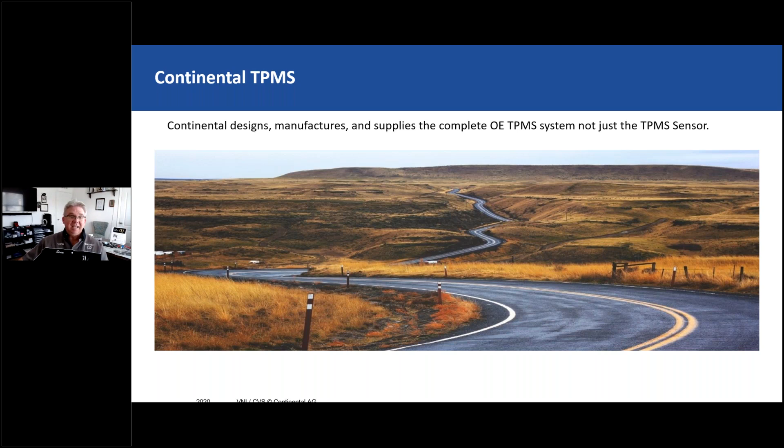Continental's TPMS: we design, manufacture, and supply the complete OE TPMS system, not just the wheel sensor. In '98, we began developing TPMS products. In 2003, we became an OE supplier of direct TPM systems and sensors in North America. In 2005, we introduced VDO branded replacement sensors to the aftermarket, the part houses, everywhere like that might be using these. And maybe many of you have seen these sensors.

And in 2018, we have produced over 300 million sensors. So that's a lot of sensors, and we're not the only sensor manufacturer out there. Obviously, you know that, there are many other sensor manufacturers. So just think of the number of sensors that are out there on the road.

So let's quickly cover the mandate. Many of you are probably familiar with this. If you're not, and you have questions of why, please ask those, but we'll briefly touch this. Again, if you have questions, go ahead and ask those.

The mandate was a phase-in over a 3-year period of time. Model year 2006, 20% of all vehicles sold in the US with 4 wheels and a gross vehicle weight rating of 10,000 pounds or less had to have TPMS. Model year 7, 70% of those vehicles sold in the US had to have TPMS. And by model year 8, or September 1st, 2007, it became 100% mandated.

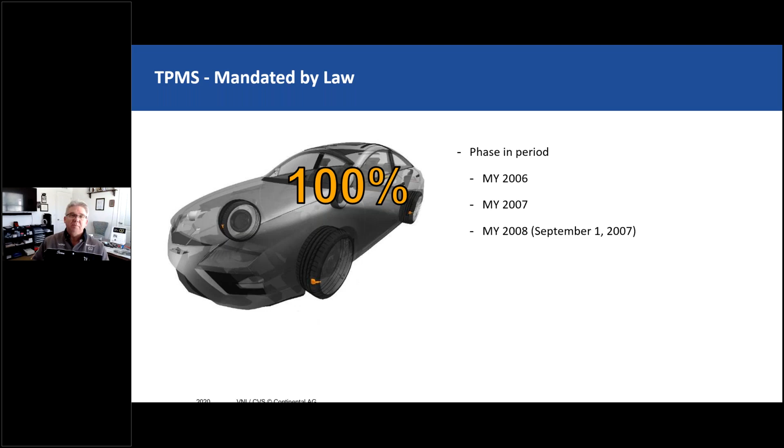That mandate had basically 2 levels of requirements to this rule. First, it must detect and provide a warning to the driver within 20 minutes of the pressure of 1 or more of the vehicle's tires, up to a total of 4, falling 25% or more below the recommended cold inflation pressure. This was illuminated solid as a low pressure warning telltale, displayed as a cross section of a tire with an exclamation point inside. That was the first requirement.

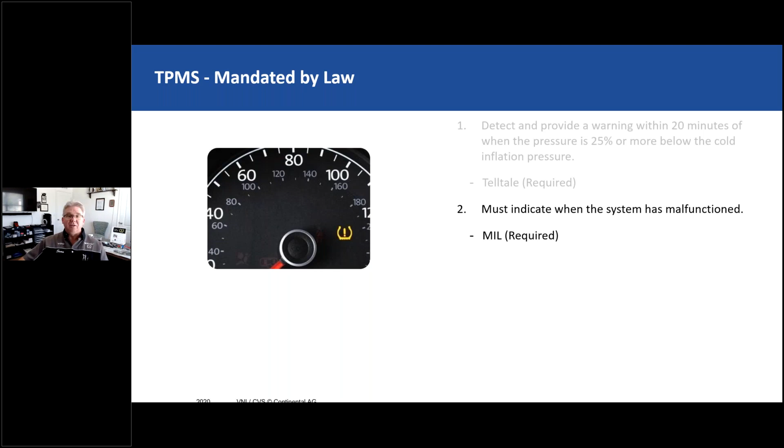The second requirement is that it also must indicate a system malfunction, as a MIL, or malfunction indicator lamp, which must flash indicating the system has malfunctioned. A top-down view of the vehicle is not required, but this shows the 4 pressures displayed as an overview or a bird's eye view of the vehicle. This is becoming more and more standard on many vehicles.

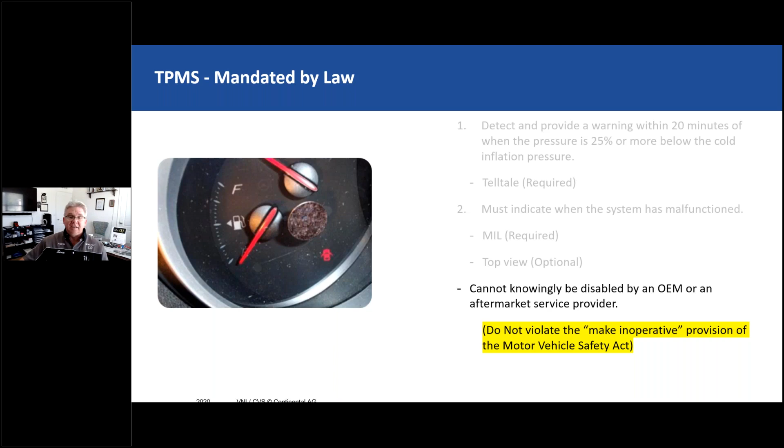There is also a make inoperative provision to the Motor Vehicle Safety Act. It states that this system cannot be knowingly disabled by an OEM or an aftermarket service provider. You see that picture showing a piece of tape covering the light. Many of us have seen this in the past, a picture of a family member or something like that covering that light so that we don't have to look at it. As technicians, we cannot do that. It is violating this Safety Act.

So what is a telltale? It's a device or object that automatically gives us a visual indication of the state or presence of something. In regards to TPMS, the telltale is displayed after key on, first a bulb check like many other telltales and gauges, approximately 3 to 5 seconds.

After that, the light will either go out, remain on constant, which means there's one or more low tires, or it will flash. TPMS flashing with a MIL is only required to flash for 60 to 90 seconds, and then it will go on constant.

This means there's a system problem. Most of the time, that system problem is sensor related. Yes, there could be problems with modules in different parts of the car that relate to TPMS, but most of the time, it is a sensor issue.

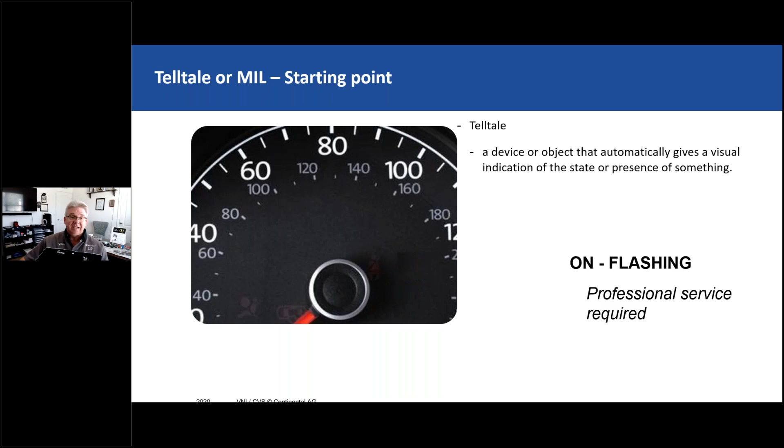And this cycle will repeat every key on. It'll repeat this exact cycle until the problem is fixed.

Now, we'll talk real quick on 25% below, because most manufacturers don't do 25%. They're in the 12 to 15% range. So if we take 32 for example, 12% of that is right around 4 PSI. So that means at 28 PSI on many vehicles, that light's coming on.

4 PSI is really nothing. We can easily see that loss on a cold morning after a warm day the day before, or working in a shop on a vehicle where it's 60, 70, 80 degrees, maybe 90 in the summer, or 100, 110, and it gets down to 60 or 70 degrees in the morning. That's 30, 40 degrees difference.

We lose and gain about 1 PSI for every 10-degree temperature change. And we lose about 1 to 2 PSI every month.

So think of a vehicle, you're working on a vehicle and you put 32 PSI in and it's 100 degrees in the shop. That vehicle goes outside, temperatures equalize, sits in the driveway or the garage in the morning. It's a cool morning and now it's 70 degrees. That could be 30 degrees difference, or 3 PSI.

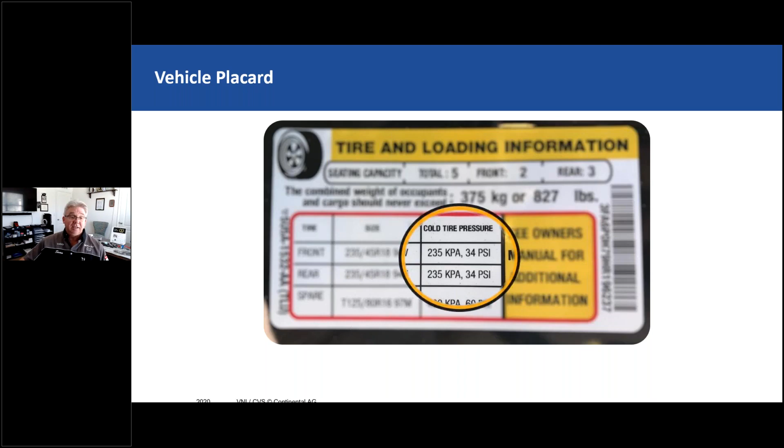So system types. I'm going to talk about the two types of systems, and then later on we'll talk about the types of direct systems. There's multiple types of direct, but there's basically two ways that manufacturers use to determine a low tire.

So indirect, it's a system that operates in conjunction with the wheel speed sensors, the ABS system, different things like that, along with other signals and some software processing. And this system can indirectly determine if a tire, up to 4, is underinflated. And that's the key word, indirectly determine.

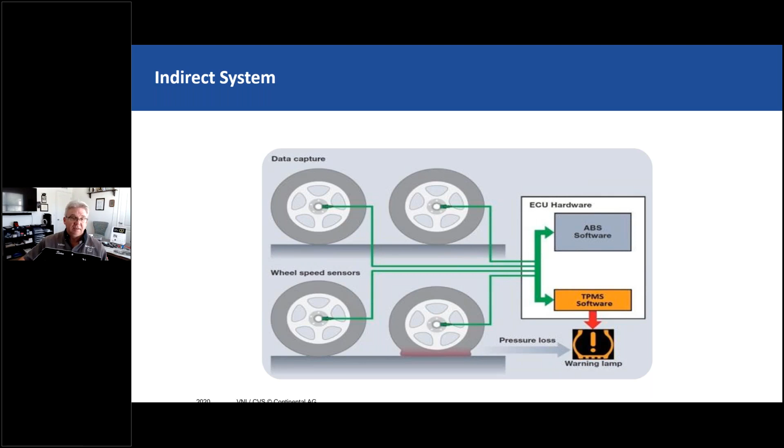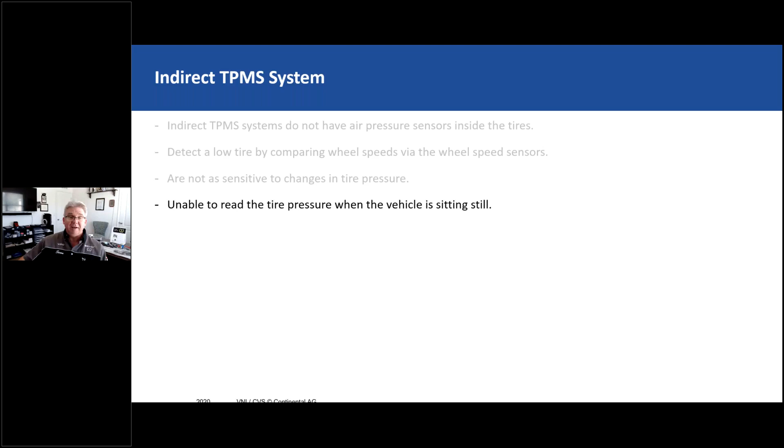Indirect systems do not have sensors inside the tires. They detect the possibility of a low tire by comparing wheel speeds via the wheel speed sensors. They're not as sensitive to changes in tire pressure. Unable to read the pressure when the vehicle's sitting still, has to be moving. We have to look at that signal we're getting from the wheel speed sensor.

It is very low cost to the manufacturer, and many manufacturers had to abandon this type of system to meet the federal mandate. One of the weaknesses of the older indirect systems is that it may not turn on the warning light if all tires are equally underinflated.

So going 3 or 4 months, we lose 3 or 4 PSI. If there's no other pressure loss other than natural, all the tires are going to be about the same. And on some of the older systems, it would not detect a difference because they're all rotating the same. Most of those are gone. Cars are still out there, but manufacturers are not using that type.

New systems, though, are taking advantage of better wheel speed sensors, maybe not counting pulses, but timing the distance between pulses, different things like that. And if you haven't seen them, here's some wheel speed sensors. Continental manufactures many different wheel speed sensors, and these are the key component to an indirect system. If you have one of these fail, sure, your TPMS is not going to work, and there's ways to look at that, and they use some software to determine if maybe that tire's not low, maybe it's a failed piece.

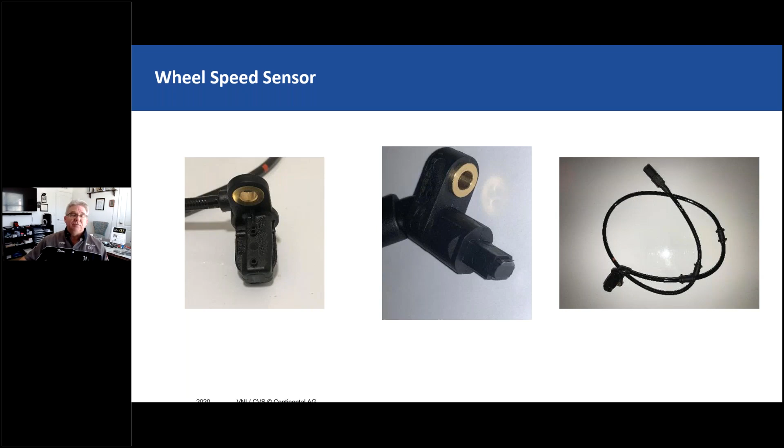But either way, if you have one of these fail, as most of you probably know, you're going to have other issues, other trouble codes, other lights that come on, other systems in the car that now are not going to work properly. TPMS will just be one of those that could be eliminated as far as functioning properly.

And with an indirect system, most of them have some sort of a reset button or a software selection for recalibrating the system. The reset is typically required after changing air pressure in one or more tires, replacing or servicing a tire, rotating the tires. These all require reset. And on some of the older systems, it is recommended in the owner's manual and in service manuals not to just replace 2 tires or 1 tire, but rather all 4, because even 3, 4, 32nds of tread depth difference can cause this light to come on. So newer systems are better, but there's still vehicles out there with these types of systems in them.

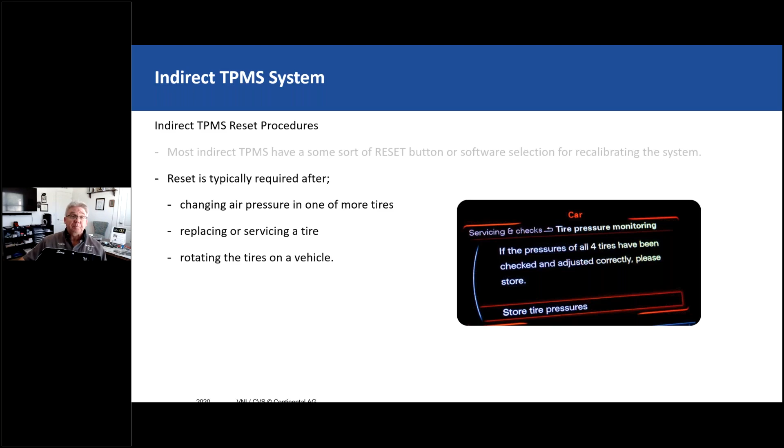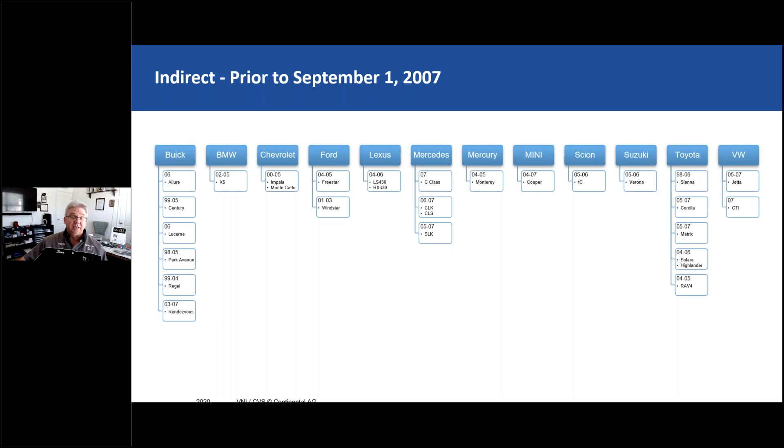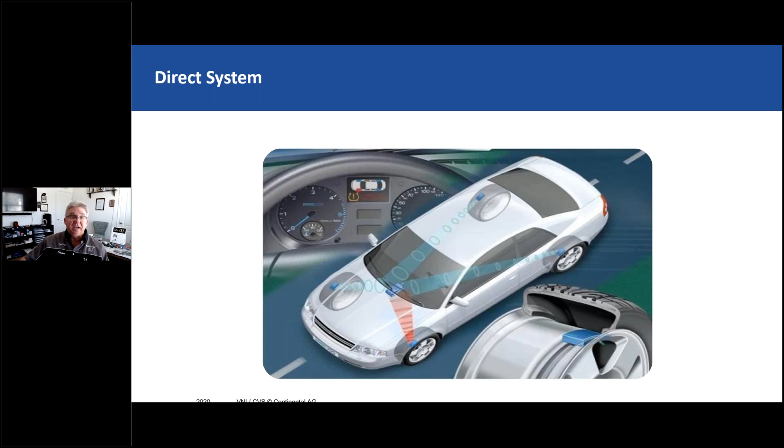Now, direct systems actually use a sensor in each tire. That's really what we're going to be talking about the rest of this presentation, and that's most of what we see in the shops when there's a problem with TPMS. These physically measure pressure and report it to the vehicle to display a low tire as a telltale, and sometimes, depending on the vehicle, the actual pressures. So a direct system uses air pressure sensors inside the tires. It measures the exact pressure of the tire. It reads the tire pressure when the vehicle is standing still.

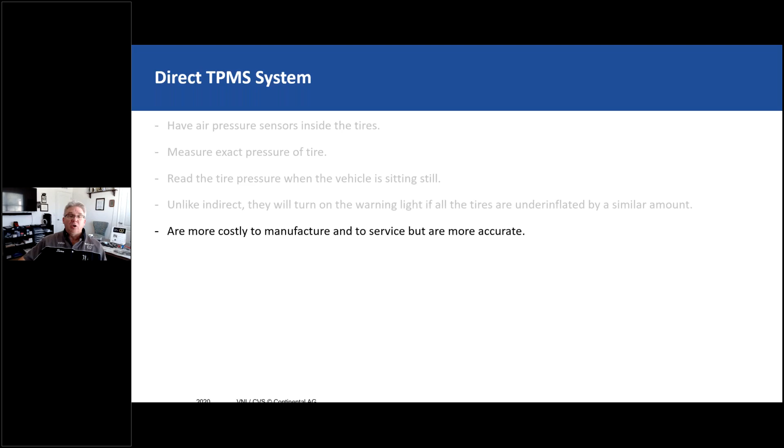Unlike indirect, it will turn the warning light on if all tires are underinflated by a similar amount, because each one is measured individually. They are far more costly to manufacture, far more costly to service, but they are far more accurate as well. And they are capable of displaying pressure by position to the driver, which we see in more and more vehicles today. One thing to note, 95% or more of all TPMS equipped vehicles in the US are direct.

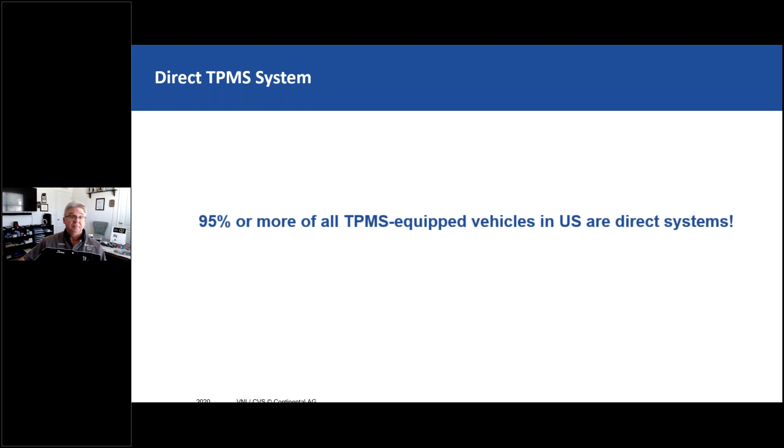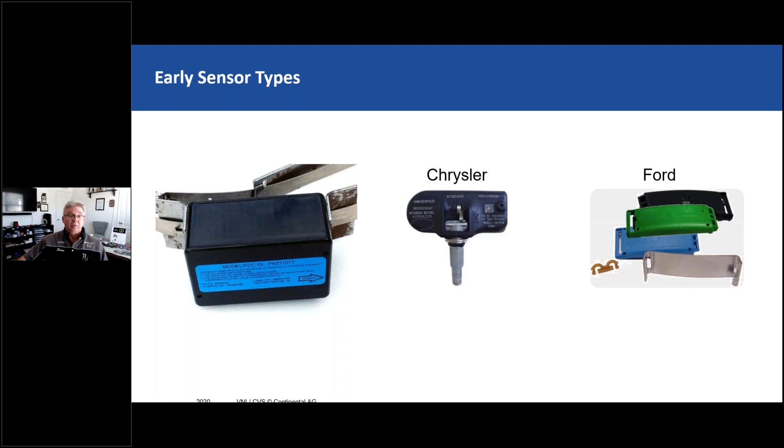Chrysler used a sensor through 2012 that had a little strap, and you can see right there in the highlighted area that was easily broken if not properly handled. This would cause a weak signal to the receiver, but a TPMS tool at the tire wouldn't be able to detect the weak signal.

It would say that the sensor's okay. So many vehicles would have trouble codes stating a weak or no communication from one or more sensors. When you drive it, customer comes in, you got a trouble code. But after a while, or moving slow or sitting there, it would pick up the response from the sensor and the light would go out. This is a reason it is important to have TPMS tools that can read these trouble codes, so you can pull these codes and see what the code is.

And then the banded style from Ford, very common, used on almost every Ford through model year 2010. Has been discontinued, but still can be used out there as a replacement sensor. They're still out there on many vehicles. And I'll probably say it a couple times, but these sensors last about 7 to 10 years, all of them. 7 to 10 years is a typical life cycle of a sensor. So these sensors, model year 10 was the last year. We're coming up on 10 years, but they're still out there.

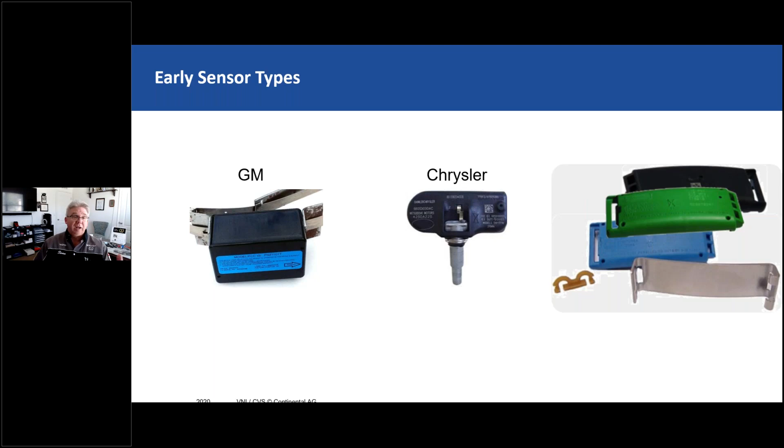Here are two sensors currently in use by Continental today, and other manufacturers are using similar designs. We might see more designs in the future, and I'll show you some of those in a few slides. But this is a clamp-in style and a snap-in style, so a metal stem and a rubber stem. One of the key reasons the stem was metal is because it's stronger. It bolts in or clamps in.

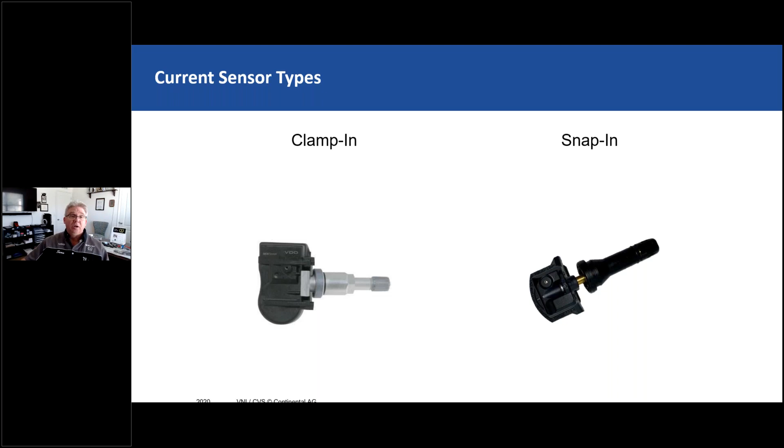And the bodies of these sensors were pretty large, so with centrifugal force spinning that wheel at 70 miles an hour, the force pulling on that sensor, if we had a rubber stem behind it, could actually rip it right out of there. So it was more of a speed rating than anything else. There were other factors, but that was the biggest one. Now, as sensor bodies get smaller, we're able to use, and you see out there, more snap-in style stems.

All sensors have a hole in it. That's what measures the pressure. And this hole can be damaged. It can become plugged. Using tire sealants can actually plug these. Think about, what is a tire sealant for? It's to plug a hole. This is a hole. Could it be plugged? Yes. So we have to be careful of the tire sealant in there. Clean these off. You can't stick anything in those holes, because right below that, about 2 millimeters, is a diaphragm that's made out of, I think, glass, and it can easily be damaged if we poke something in there. You can wash it off with your hands, clean it off, whatever.

And the other thing is, tire sealant won't hurt the sensor, but it could damage the size of the hole or plug the hole. We can wash it off, clean it off, but a lot of people, when they grab tire sealant, they're not grabbing one can and reading the directions that say use half the can or whatever the directions say for that brand. A lot of people buy 2 or 3 cans, because not only are they trying to plug the hole, they're trying to fill up their tire with air as well. So they're using the canned air with the chemical in there that could plug this hole. We just have to watch that and be careful.

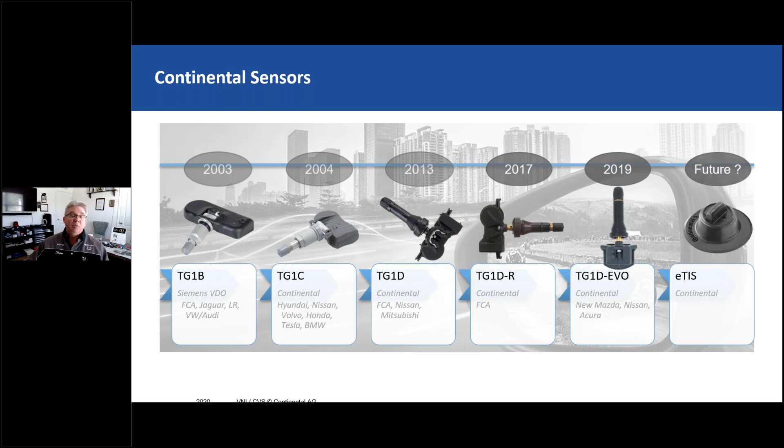It's also used in commercial vehicles, larger trucks. It's actually very small for the passenger cars. And the rubber mount there becomes a service kit, just like all the other sensors have. So if you have to change a tire, you pop out the sensor, you put the new rubber service kit in, snap the sensor back in, and away you go. I got a slide on that in a little bit as well.

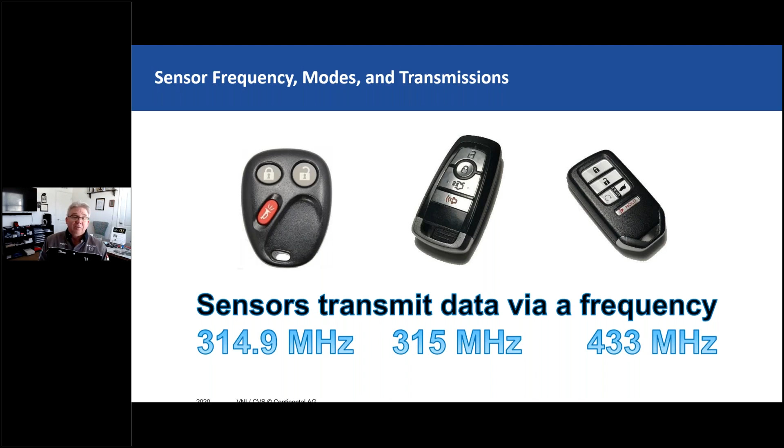So if you need to determine sensor frequency and you have the capability to test a key fob with, for example, a TPMS tool, you can test this key fob. It'll tell you what the frequency is. And then if the parts house needed to know what frequency you needed, then they can determine what the part number is for that replacement sensor as well.

Most all sensors have to transmit a unique sensor ID. It's also printed on the sensor. It's usually printed or used by the vehicle in an 8-character hexadecimal format. Tools have the capability to convert to a decimal, but most vehicles, like I said, store this as a hexadecimal format. Some vehicles only use 7 characters, and a few newer vehicles require certain characters to be in specific locations. So our tools have to be capable of reading this. Tools need to be able to update or load this into the vehicle.

Maybe some of you are familiar with, let's say, a Toyota Relearn. With Toyota Relearns, typically you trigger sensors, you get the IDs, and then you hook up a Toyota scan tool and manually type in those IDs. With a TPMS dedicated tool, the tool does that work for you. You trigger the sensors, the tool stores the IDs, you plug the tool into OBD, and it writes or uploads those IDs to the vehicle without having to worry about copying them or writing them down.

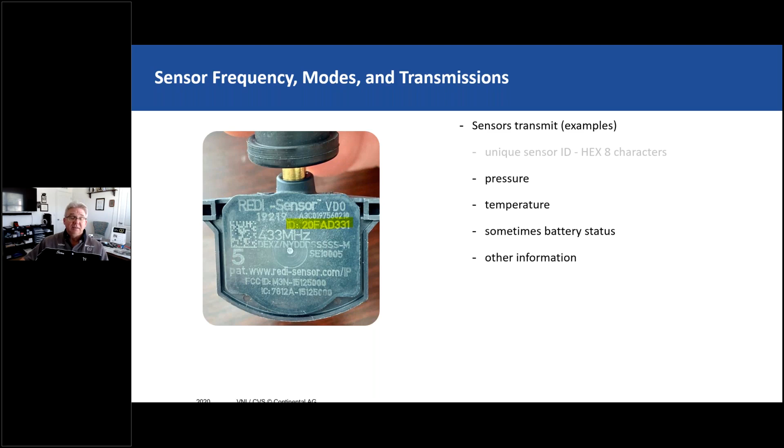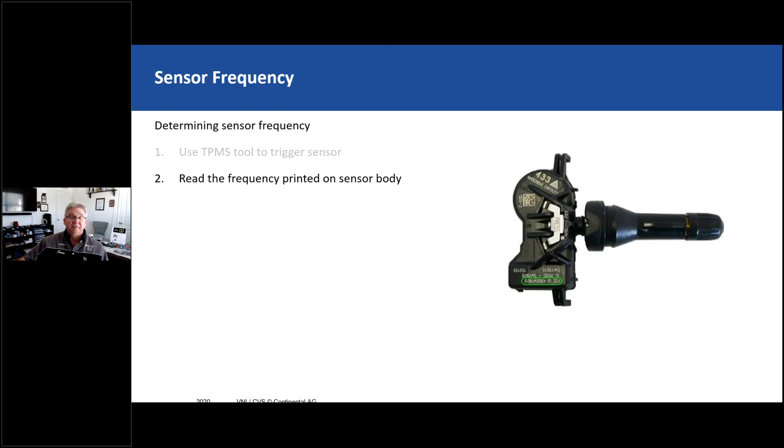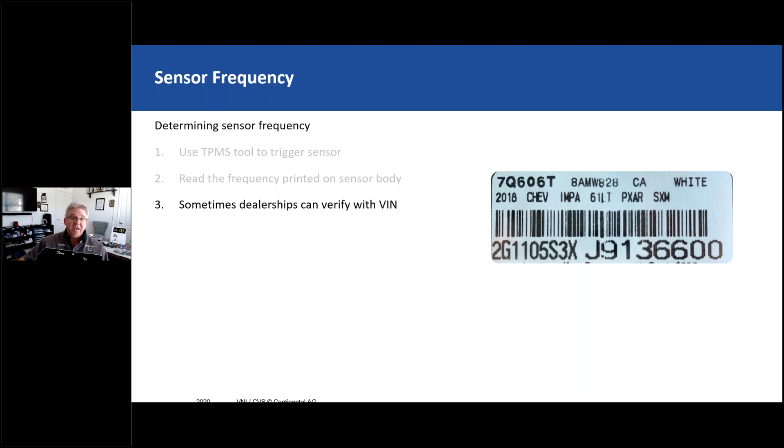So there's many ways to determine sensor frequency. You can use a TPMS tool to trigger the sensor. Most TPMS tools will display the frequency right on the tool. You can read the sensor frequency printed on the body of the sensor, if you can read it. Sometimes it's small, it gets worn off. Plus, you have to break down the tire and wheel assembly to see this. Sometimes you can call a dealership and get it with a VIN, but not always. Depending on the vehicle make, sometimes they don't record this, because they change based on different vehicle platforms. Key fob test on the tool, like I said, that's very easy.

And you can visit the FCC ID website, type in the ID if you can read it on the sensor, and it'll tell you who manufactured it, what the frequency is, pictures of it, all kinds of stuff. So if you ever want to find out what brand or manufacturer or what the frequency is for a sensor, type in the FCC ID on Google and you will easily find this information. A lot of information is found on this website.

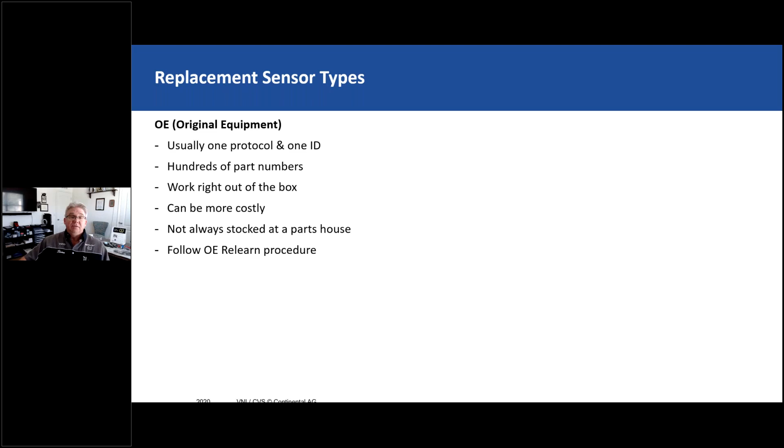So let's talk about the different sensor types. You have the OE sensor, original equipment sensors. They usually have one protocol and one ID already stored in it. There's hundreds of part numbers, yet they work right out of the box. They can be a little more costly, not always stocked at parts houses, and it's recommended to follow the OE Relearn procedure when changing these.

Programmable sensors are delivered blank. They require a capable tool, and that could be an additional tool. And wherever you're getting these from, that parts house must know if your shop has the proper tool to program the sensor. If you don't have the proper tool, you can't program it. You think something's wrong, you send it back, when really the sensor needs to be programmed. Some can only be programmed in a specific cradle. They're suggested to be programmed outside the tire, and the protocol comes from the tool. So if your tool is not updated, you won't have the proper protocol.

Clonable, very close to programmable, very, very close. Again, cloning only copies the sensor ID, but the protocol comes from the tool. Takes time, really the same as a programmable sensor.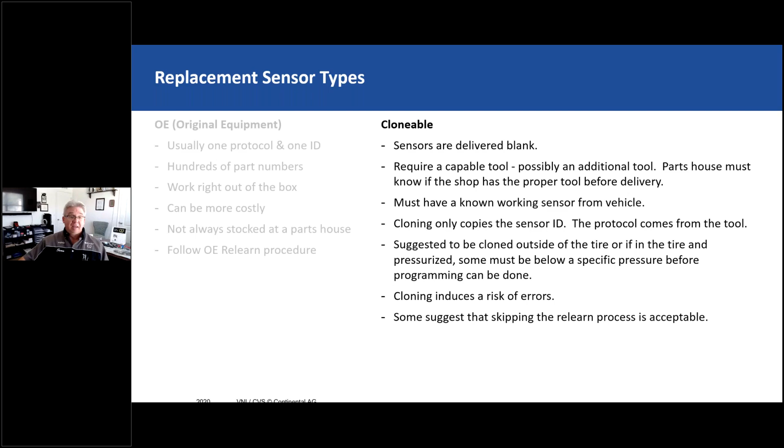And then there's a multi-application sensor. This is just like VDO's or Continental's REDI-Sensor. The difference between this one and the OE is it has multiple protocols already in it. The ID's already there. But just like OE, it works out of the box. It saves time. You don't have to program it. It follows the OE procedure. So it's very, very close to an OE sensor.

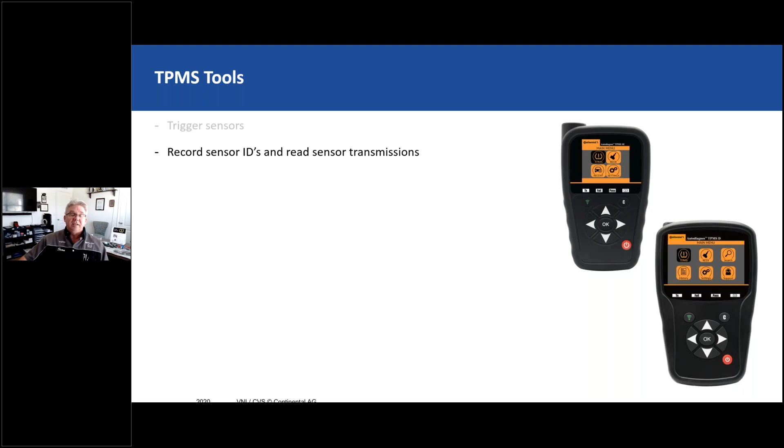So the tools we use. Tools have many functions, and depending on brand and model, these can have very basic or extremely advanced capabilities. Most importantly, they trigger sensors. They record the sensor IDs and read the transmission so that we can figure out if that's the right sensor for that vehicle, if it's working, functioning properly.

They're used to perform vehicle relearns. Key to do relearns on these vehicles. Additional capabilities like uploading to OBD or pulling trouble codes or tread depth gauges or testing key fobs, many different things out there that we can do with these.

They also require updates, so make sure we keep them updated. My team and I visit many shops every year, and 8 out of 10 shops don't have their TPMS tool updated. And it just causes them extra time when they're working on a vehicle. Many TPMS tool companies offer free support, so use it.

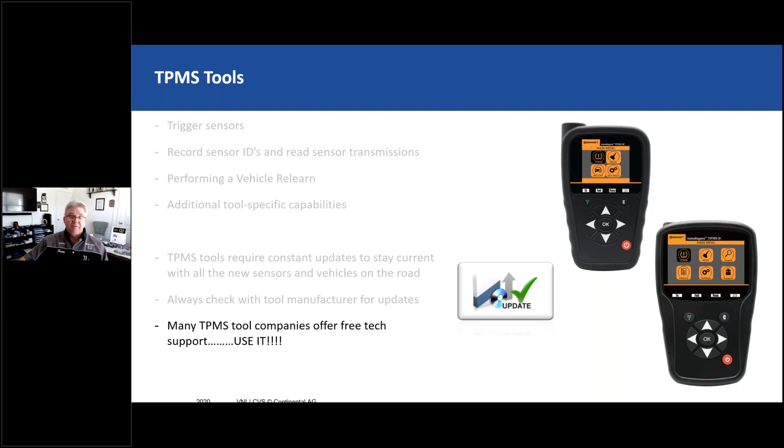Here's just a quick example of some of the tools out there today, but to fully service TPMS, you must have a tool that has OBD capability. When you're triggering sensors, angle the tool downward. Avoid pointing it horizontally at the sensor, and this will reduce the possibility of triggering a spare tire or the opposite wheel sensor. The other key thing is to move sensors away from your work area.

Take them out of your pockets, off your lift arms, off the toolbox, out of the car. Those winter tires that you put in the trunk or the back of the car or the SUV, don't do that while you're doing a relearn, because then we're not talking to 4 sensors, we're talking to 8 possibly. Move those away when we're doing relearns.

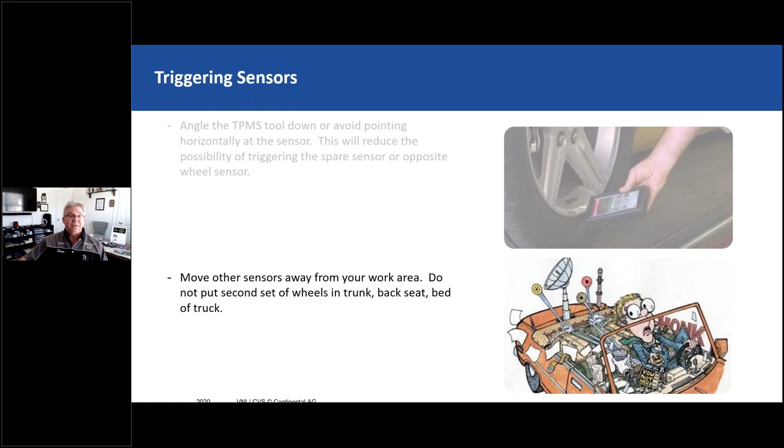Continental has 2 tools now. I won't spend a lot of time on this, but TPMS D, all makes, all models with diagnostic and service capability. The SE services all makes, all models.

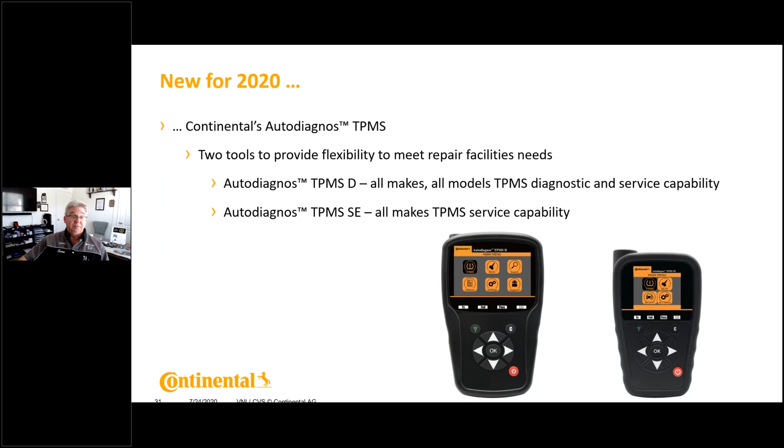Let's talk about relearns real quick. We use the tools to diagnose and perform relearns. It's strongly recommended and of great importance for vehicle owners' safety that following the installation of any replacement sensor or tire rotation where sensors are relocated, a servicing shop should follow the vehicle manufacturer's recommended relearn procedure.

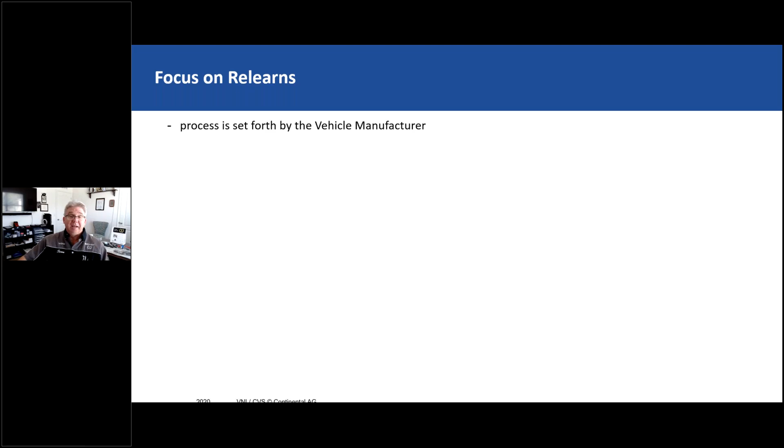It is required to remove previous pressure values, and it's set forth by the vehicle manufacturer. It removes old data that might be there, old pressure values, diagnostic trouble codes. It ensures whether the system is fully functional or not. Right then, when you're doing it, you know the relearn's done, the car is done properly. It establishes the correct tire location, pressure, and pressure reading to the driver.

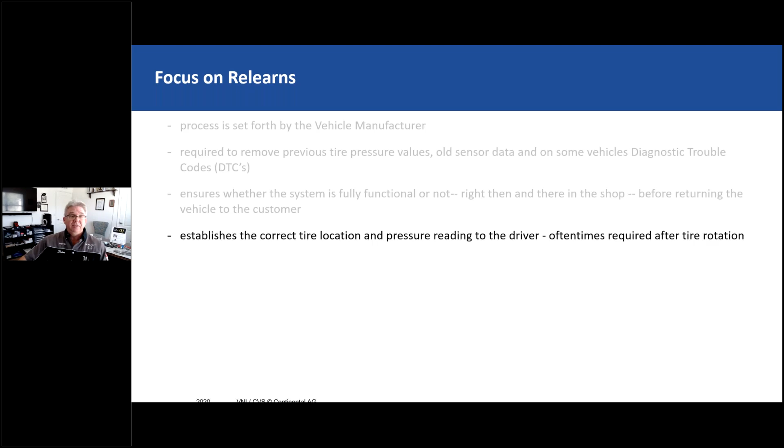You do a tire rotation, many vehicles can't learn that location by themselves. We have to do the relearn. And it's required when there's a change in pressure, even on some models now. And if we bypass this or don't do the relearn, we may be violating the make inoperative provision, because now we've sent a vehicle out and the pressures on the dash are wrong. They're not shown in the right place.

And if a person needs to fill up a tire and they see the left front's low, they go put air in that tire, but we rotated it and it's somewhere else on the car. Now they've overinflated a tire and they still have an underinflated tire. And on some GMs prior to, I think, 2010 or 12, the light was illuminated for high pressure and low pressure. So we would never know which tire or what's going on. So we have to make sure we follow these relearn procedures.

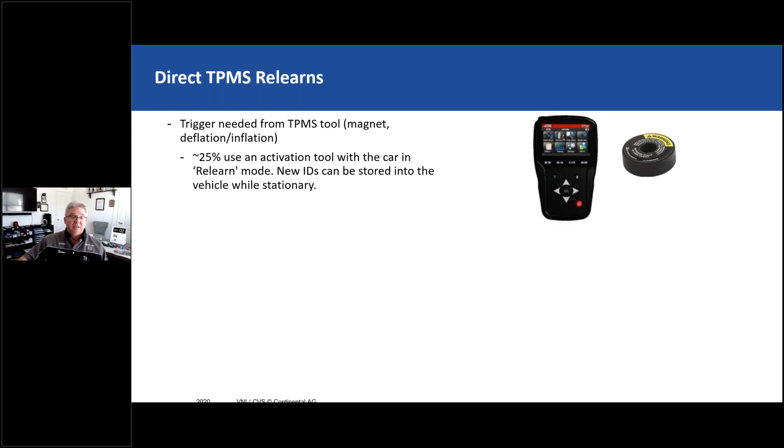25% of the vehicles out there use a trigger from a tool and they use some sort of relearn mode. The vehicle goes into a mode. 35% connect to the OBD. Still require a trigger from a tool, but then you upload it via the OBD2 port. And then 40% of the vehicles can learn new IDs by driving. It's automatic. But many of us in shops can't drive the vehicles, or we don't have the time.

Jaguar, for example, their relearn procedure on some vehicles is leave the vehicle sit for 15 minutes, drive it for 30 minutes over a specified mile per hour or speed, and then leave it sit for 15 minutes. That's an hour of labor just to do that relearn automatically.

On most vehicles, we can use that middle one, which is OBD. So it's either the trigger at the top or OBD, and that covers just about every vehicle out there. Auto relearn's great, but sometimes we don't have the time. And if we let the customer leave with it, and it doesn't complete or doesn't work, then they come back to the shop, and we could have just done the OBD2 relearn. So not all vehicles can do OBD, but most can. And indirect systems have some kind of a reset rather than a relearn.

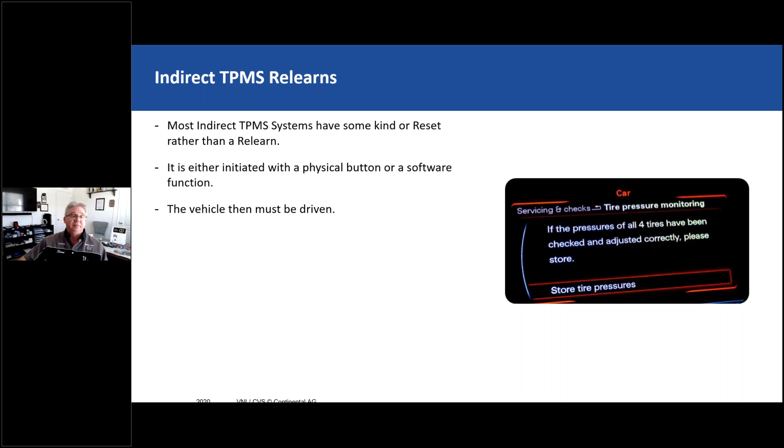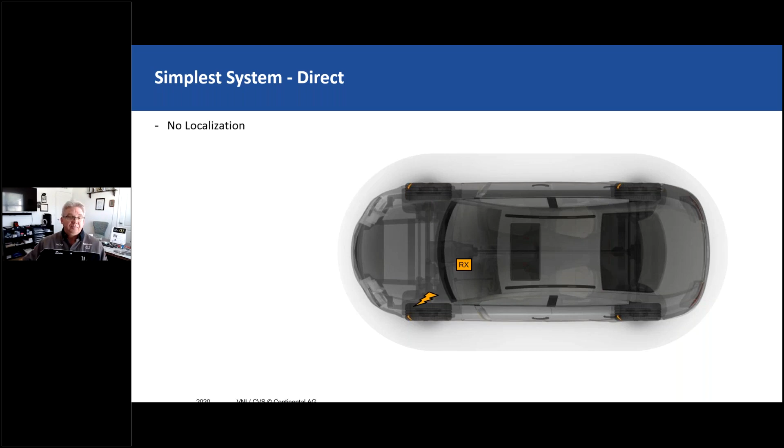So the types of direct systems. Here's an example of a simple system with no localization. During a relearn, it's stationary. Sensors are triggered and the vehicle stores the IDs. This could use potentially any of the three relearn types: trigger, OBD, or auto relearn. However, most are going to be trigger or OBD. Pressure is then received from the sensor and checked against the threshold. Since it doesn't have localization and only a telltale light, there's no indication where the fault is. It's just going to show us the light and maybe tell us that there's a low tire. Even though there's no localization, this type of system still must have a relearn procedure performed. We don't want to get into the habit of not doing relearns or guessing what type of system is in a vehicle.

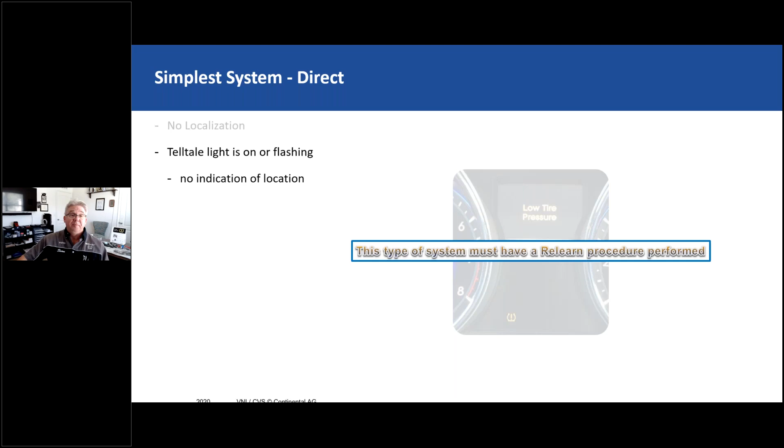Here's an example of a little more advanced system - it's a GM Ford trigger type. Many of you have probably done this. It's commonly used by Ford and GM. Vehicle stationary. This specific procedure uses a sequence of commands from the technician - a key cycle, a key fob press, headlights in a certain cycle, and you've probably heard of them all. There's many. Just so you know, GM has over 20 of those relearn type procedures for these vehicles that they have. But during a relearn, sensors are triggered and the vehicle stores the IDs and location.

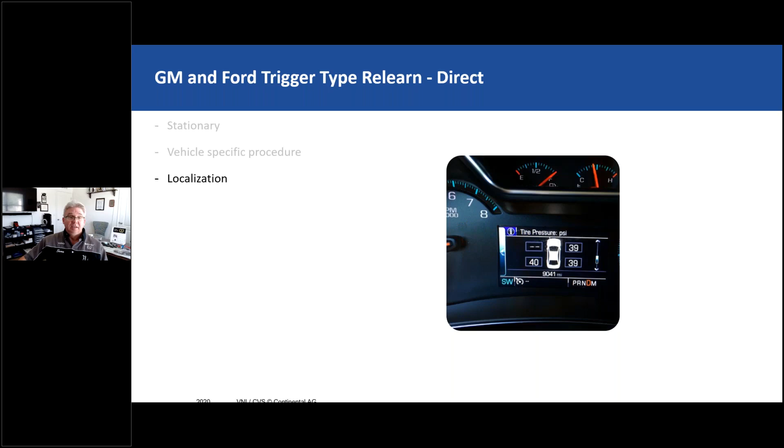Basically, you're teaching the vehicle the sensors and their location, and you follow the directions on the tool. Typically, all vehicles out there start with left front and go clockwise. Honda does have a few that start with left front and go counterclockwise. Now the sensor IDs are known by the vehicle. It's possible that this type of system can display pressure by position. And pressure received by the sensor is displayed and checked against the threshold. If one of them is low, you will see that illumination there. If one of them fails, you might see this. But this type of system must have a relearn performed, or the pressure by position could be displayed incorrectly.

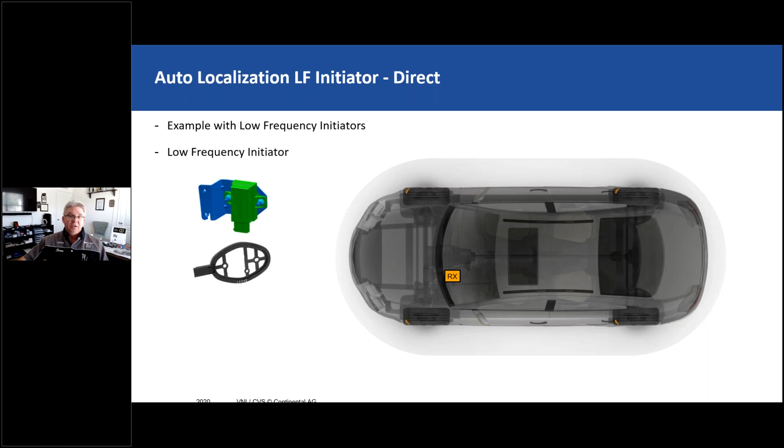Another type of advanced system, and these are all from Continental. We don't have names for the other ones. It's very common they're out there, but this one uses low frequency initiators. They're mounted in the four corners of the tire or of the vehicle. Newer technology allows these two components to be combined as one, but they're located usually in front or behind the vehicle's tire in the wheel well area.

As an example, this vehicle starts driving. The vehicle then says, hey, I need to do a relearn, I need to learn where my sensors are. The system sends signals to the low frequency initiators one at a time. So every time it sends it, it gets a response to the receiver from that sensor that it told to do something - basically wake up. And then the receiver says, hey, I just received this ID. So now the vehicle knows, for example, the left rear - okay, I'll store that ID in the left rear. It does the same thing for the other 3 locations. This type of system now knows the locations. It can automatically learn the IDs and store them automatically. We rotate tires, we change sensors - as long as you have the right sensor for that vehicle, this can be done automatically. Again, you can do an OBD2 relearn on this, but this one is pretty flawless. It works, but it requires driving the vehicle for a specified amount of time.

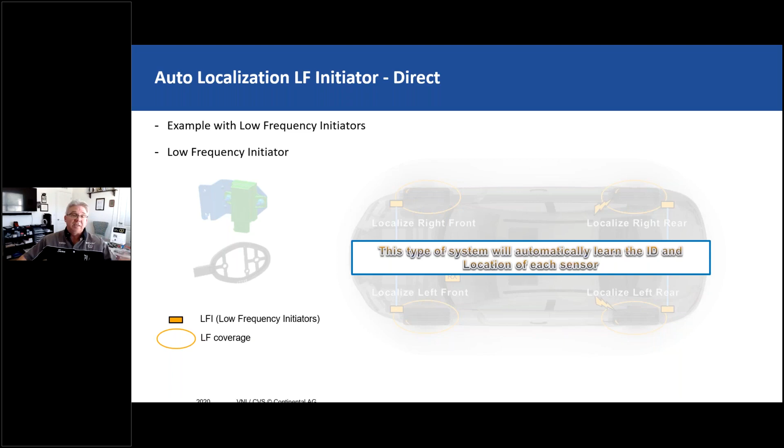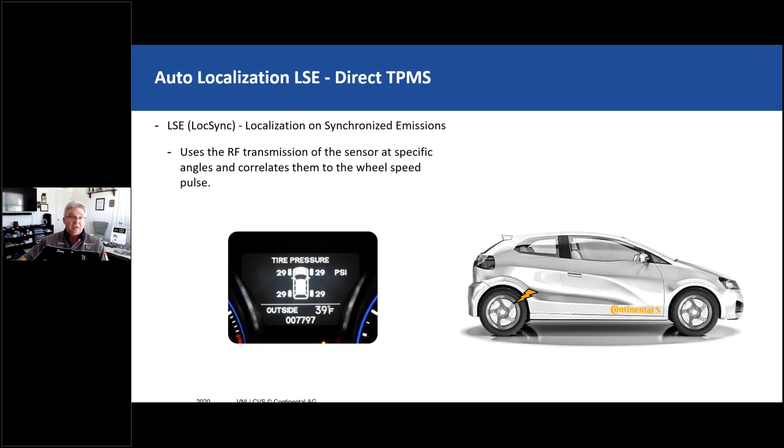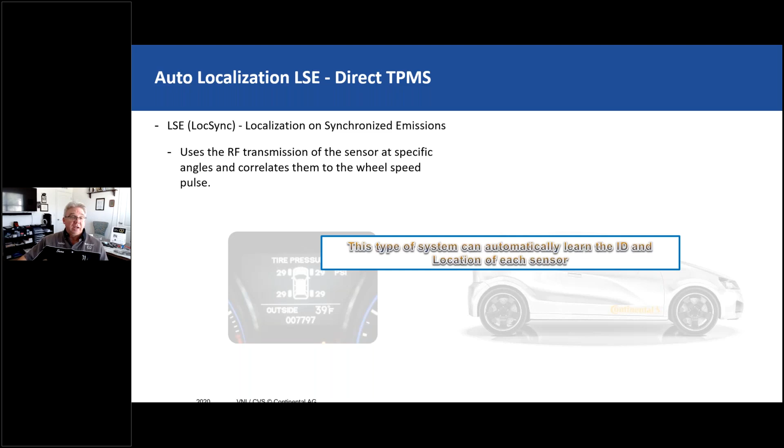Another type of Continental system is called LocSync, LSE - Localization on Synchronized Emissions. It's a Continental system that uses the RF transmissions of the sensor at specific angles and correlates them to the speed pulse. The components of the sensor allow us to have them send information at a specific angle, and the vehicle data can reference the speed pulse information of each wheel at that angle. With complex algorithms and software processing, this vehicle can automatically learn the location of each sensor. A little more detail on this: the sensor transmits always at a fixed wheel angle position. Wheel sensors deliver the position for each wheel.

After a few complete wheel turns, the TPMS sensor transmission fits only to one wheel due to its fixed mechanical connection of the wheel speed sensor and the TPMS sensor sending a signal at a specific angle. There's a lot of software processing here, but you don't need an extra initiator, module, or antenna in the vehicle—just a wheel speed sensor, the sensor in the tire, the TPMS sensor, and software processing. You have to drive this to have it happen, and it's best driven with a lot of turns, because that gets your inner and outer wheels spinning at a different rate and makes the change happen quicker so it can learn the locations.

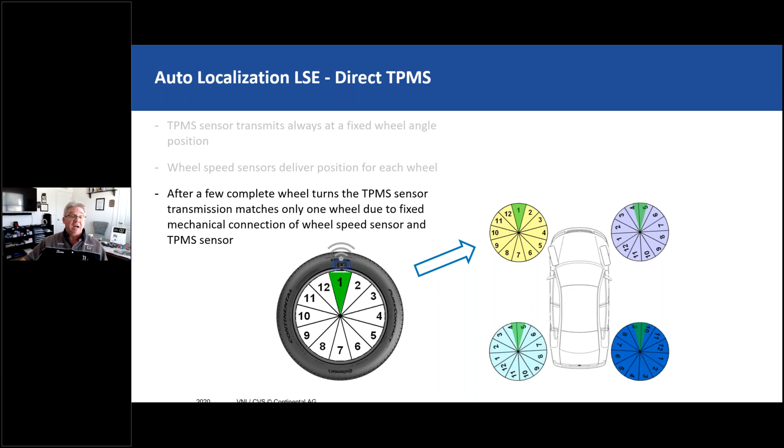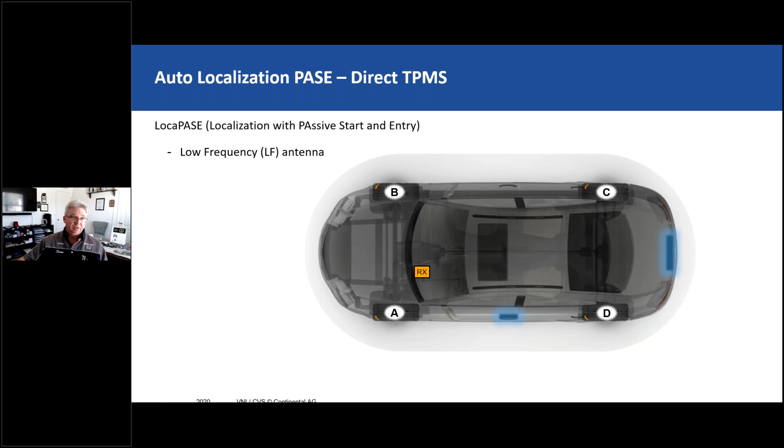Again, it learns all the sensors automatically, their IDs and locations. We have another system called LocaPASE, which stands for Localization with Passive Start and Entry. This is another Continental system. We have low frequency antennas located in the driver's door, passenger's door, and the trunk. For example, here, to save time, I use 2 locations, but it still does the same thing if we use the passenger door handle as well.

Once the vehicle is in motion, the system receives sensor data from A and D on one side, and B and C on the other. As shown here, the driver's door will pick up A and D, so we can determine which sensors are on the left. The receiver knows there are 2 other sensors, so the vehicle determines A and D are on the left, B and C are on the right. Now it needs to know which are in the front and rear. We can determine that C and D are in the rear, so by default A and B are in the front. This uses sensors in the tires, requires the vehicle to be in motion, but uses modules already in the vehicle for passive entry. Again, it can automatically learn the location of all these sensors.

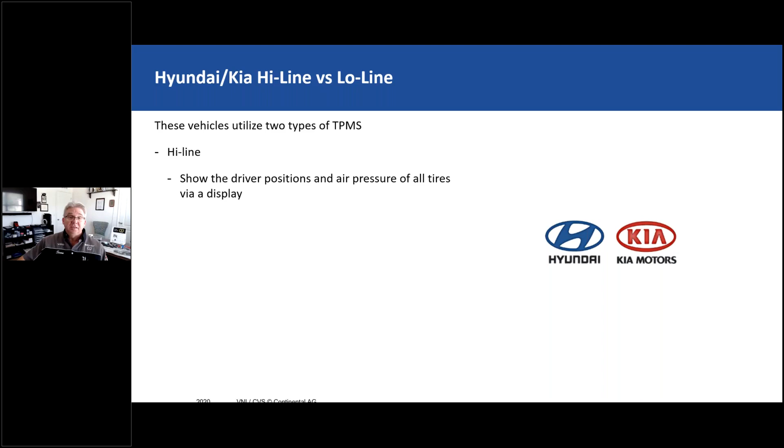So, some quick industry tips and best practices. Hyundai and Kia have low line and high line systems. High line shows the driver positions and air pressures of the tires via a display. Low line does not communicate position, only utilizes the TPMS telltale. Some model years switched mid-year, so be aware of the type of system you're servicing. Sometimes as technicians we have to look at the dash to see if it has these capabilities, because depending on the platform or level of options, a Hyundai or Kia vehicle could have come with low line or high line, and sometimes they use a different TPMS sensor. So we have to determine this before we call up and just say, hey, I need a sensor for this vehicle.

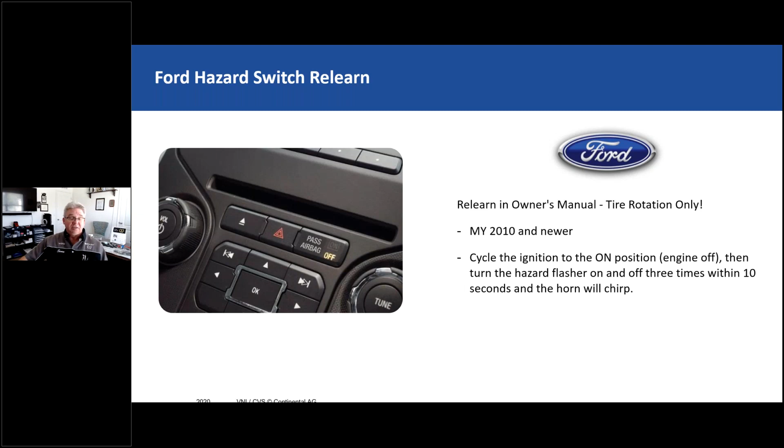For Ford, the procedure listed in the owner's manual to perform after tire rotation on many late model Ford vehicles is just for rotating tires. It states to cycle the ignition to the on position with the engine off, then turn the hazard flasher switch on and off 3 times within 10 seconds. This procedure is to relearn new tire positions after tire rotation only—it will not learn new sensor IDs. You must follow the relearn procedure to learn IDs. This one, again, is only for tire rotation. We get so many calls on this from shops where their tool recognizes a sensor, but the horn isn't honking on the vehicle. That's because the sensor's transmitting, but the vehicle will not learn new sensor IDs this way. We have to do the TPMS relearn procedure, not the tire rotation relearn procedure.

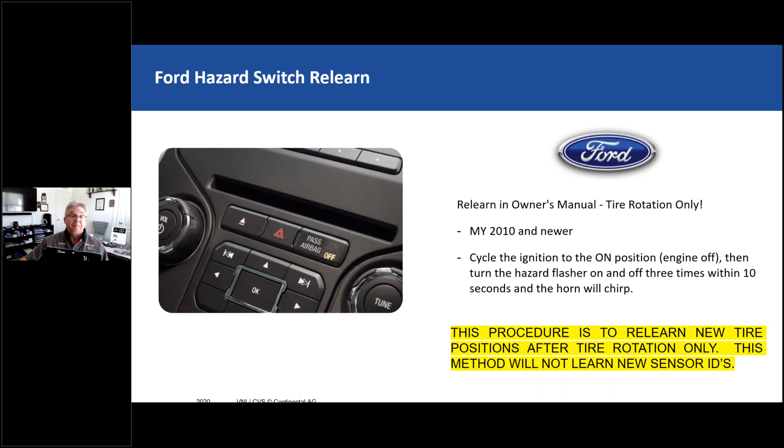Another Toyota thing: they have a main/second switch used on some Toyota and Lexus vehicles for a second set of wheels, like winter or off-road. It's usually located under the glove box. Depending on the tool you use, you may need to make sure the switch is in the main position when doing the Toyota OBD relearn. Check with your tool manufacturer for specific instructions, because there are tools out there that will not do the relearn in the second location for that switch.

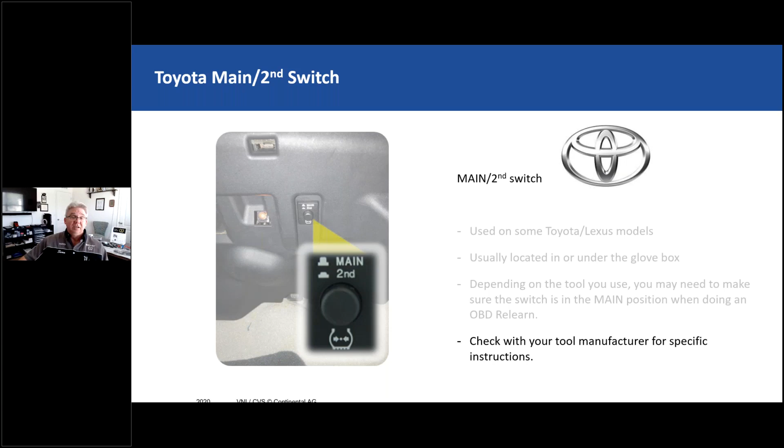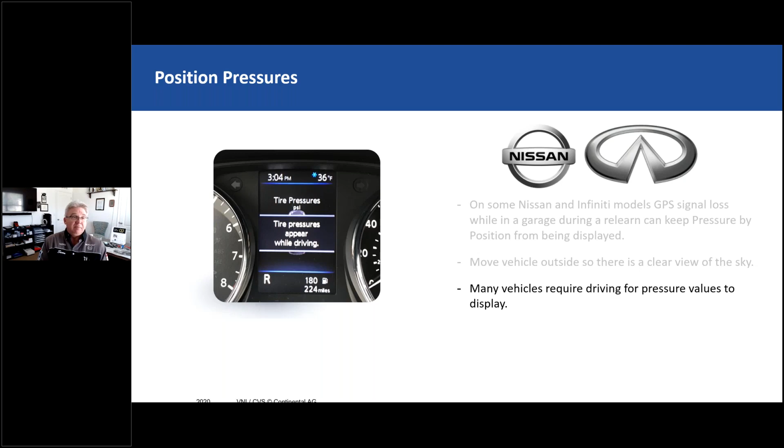Nissan, very common: GPS signal loss while in a garage during a relearn can keep pressure from being displayed. Move the vehicle outside so there's a clear view of the sky. And while we're on this topic, many vehicles require driving for pressure values to display, so you won't see them in the shop. You might have to drive to get it to display.

Stepping back to the types of direct systems, this is a tip rather than how a system functions, since Continental does not manufacture this type of system. This tip involves the use of wheels other than normal valve stem sensor mounting. For example, they mount on the inner side of the wheel rather than the outer, which I'll show you in a second. It's a direct type system referred to as WAL, used on many of these vehicle models. With a WAL system, once the vehicle's in motion at a specific speed determined by the manufacturer, the receiver can determine which axle the sensors are located at, front and rear, and then it can also determine left and right, using signal strength and rotation.

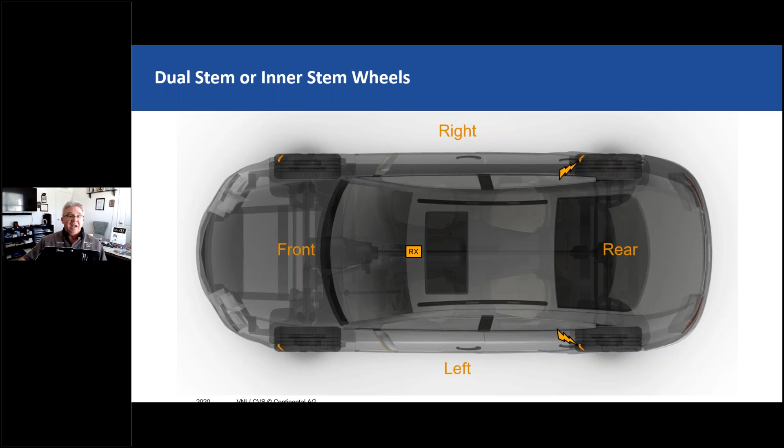So what can happen here is in this type of picture, which is common for some aftermarket wheels, we want them cosmetically to look nice on the outside, so let's put the sensor or the stem on the inner side. This causes problems on this type of system, which has been in use from '07 still through 2020 on those vehicles I showed you, and it probably will go beyond that.

Here's how they would originally be mounted right here. You can see the normal mounting of the sensors, and I've displayed the sensor with a rounded edge and an arrow showing the direction of rotation. This makes it easier to see what happens when you put those types of wheels on a car like this. So now we've mounted this sensor in this wheel, and if you notice, it is rotating opposite than what it was originally.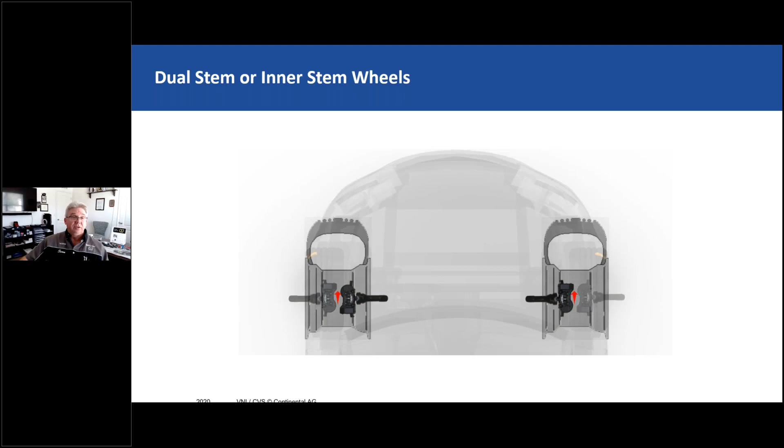We're not going to see a difference or anything; it's still going to transmit the information. But what could happen is, if this was a vehicle that uses this information, those pressures get switched. It won't turn on the light, won't do anything, so now we don't know which is the proper pressure. The driver will never see any indication or notice a difference. But if you have a low tire, it possibly could be shown on the other side. That's just a tip from us. We don't manufacture that type of system, but it is out there. It's called WAL, Wireless Auto Locate. It's very common, works very well. It's just something you have to be aware of.

Some examples of what not to do: strap a sensor on and have another one next to it—I'm not sure what they were doing here. Or all 4 sensors strapped into a wheel, put a tire on it, air it up, throw it in the trunk. Or a PVC pipe pressurized with sensors, throw it in the back seat or in the trunk. And then duct tape—it's not as strong when it's seeing 70 Gs pulling on a sensor, ripping it right out of the drop center of that wheel.

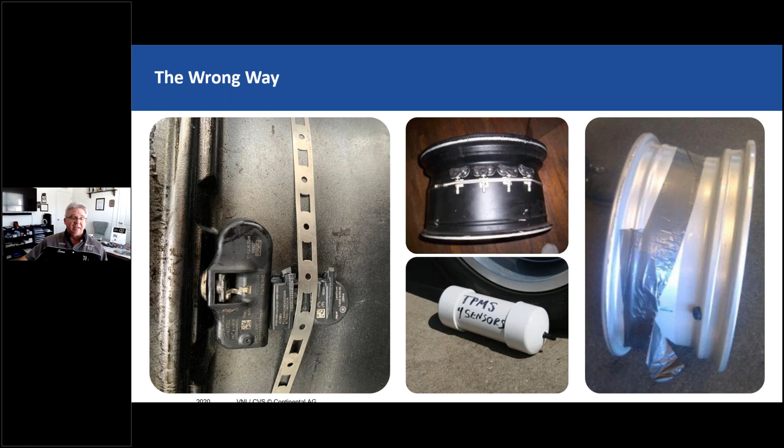So, enhancements and the future: we now have selectable tire fill alert, tire fill assist, tire fill alert, easy fill alert, trailer TPMS, tire temperature and pressure monitoring system, and tire pressure information system. These are just some of the new acronyms that technicians and drivers are going to need to know going forward, and there's probably more coming.

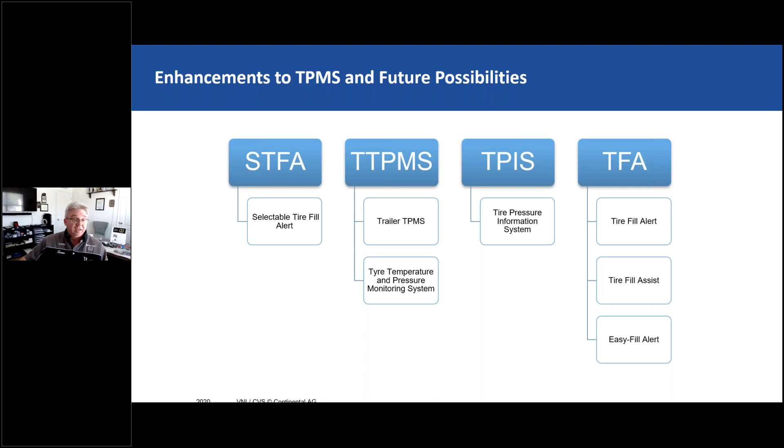As far as tire fill assist goes, or TFA, there are 4 different systems out right now: Honda Acura uses one, GM uses one, FCA, and Nissan Infiniti. TPMS with a tire fill system is a visual and audible alert system to help customers properly inflate their tires. We still should look at the placard, but this is something that OE manufacturers are really seeing that customers like, so now they're putting it in all these cars. They all operate differently, but they have very similar characteristics.

While inflating, they give an audible or visual indication. When you hit the correct pressure, you get an audible alert—maybe 2 or 3 horn honks—and a visual indication, the hazards flash on and off. And then if you go over, you might get multiple audible alerts or a different change in the visual indication. But they're all operating very similarly.

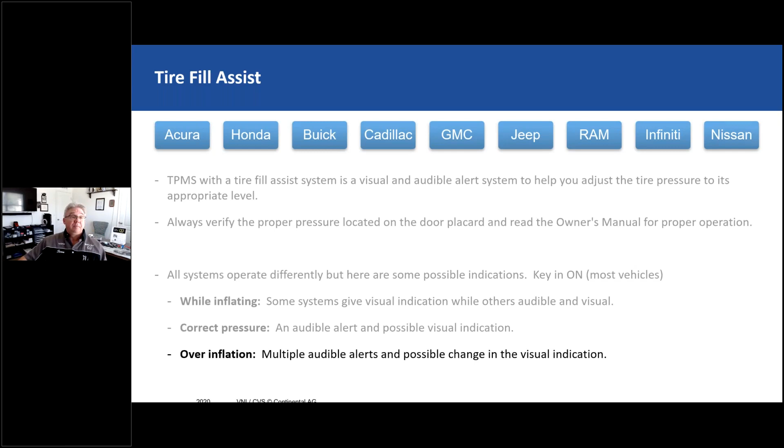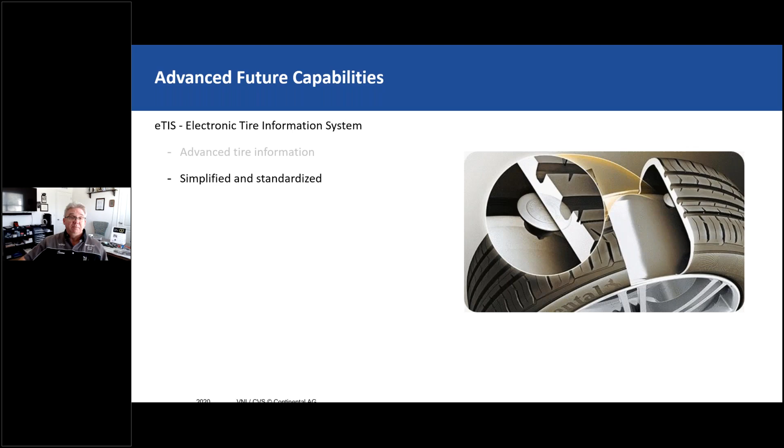Again, no OE or aftermarket uses this in the US, but it is used in the aftermarket in Europe. It is a real product. It's just not being used yet by OE. It is being used by commercial vehicles, however. It can be easily activated with the TPMS tool, just like what we have today.

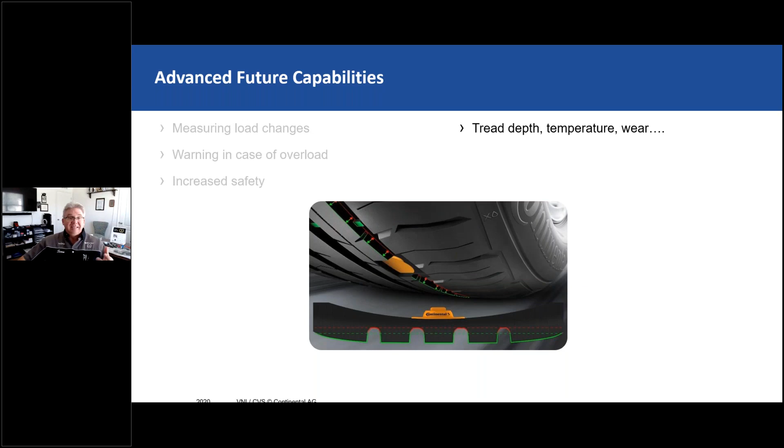But one of the key things is one size fits all, because it doesn't matter what size the valve stem is or how it's mounted. It mounts to the inner side of the tire. It can give us load changes, alerts, different things like that, overload, increased safety. It has the ability to measure tread depth, temperature, tread wear, additional cost savings, optimized tire life, and reduced fuel consumption and CO2 emissions.

And from this, we can also get what's called a hydroplane warning system. Again, a real system that Continental has. Cameras are the key early warning to this detection, though. The cameras that we now have on the side view mirrors can recognize a splash or a spray pattern from the tires. And as a vehicle hydroplanes, that pattern changes. This could be the key to saying, hey, you need to look at the speed of the vehicle.

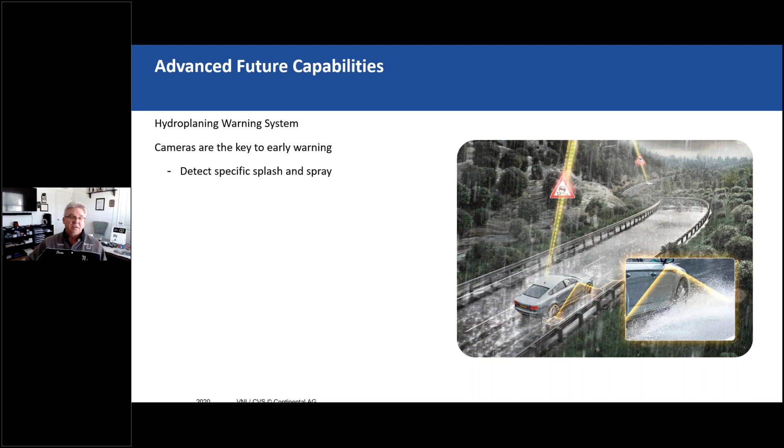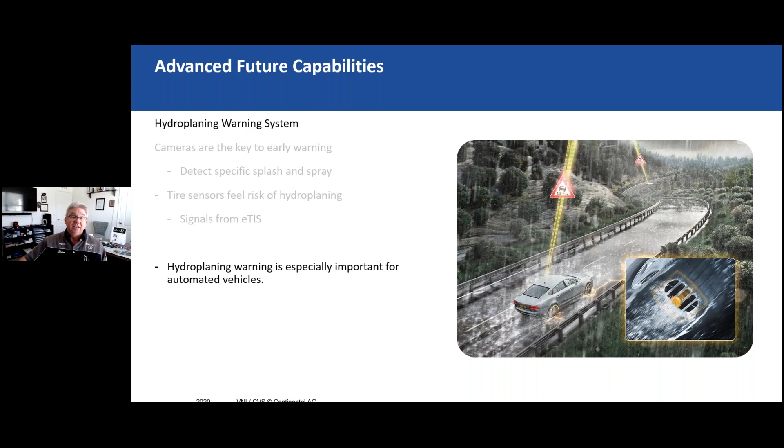And this is the car basically telling itself, because we have adaptive cruise control now. Autonomous things are going on in these vehicles. And so then it pulls information from the sensors in the tires and says, hey, what's going on? Is there water in that tread? Do we have worn out tires or a risk of hydroplaning from no tread or low tread, whatever it is? It's especially important for autonomous vehicles because a lot of these systems are doing things on their own now. For Continental, this type of system is another step forward to our Vision Zero, traffic without accidents.

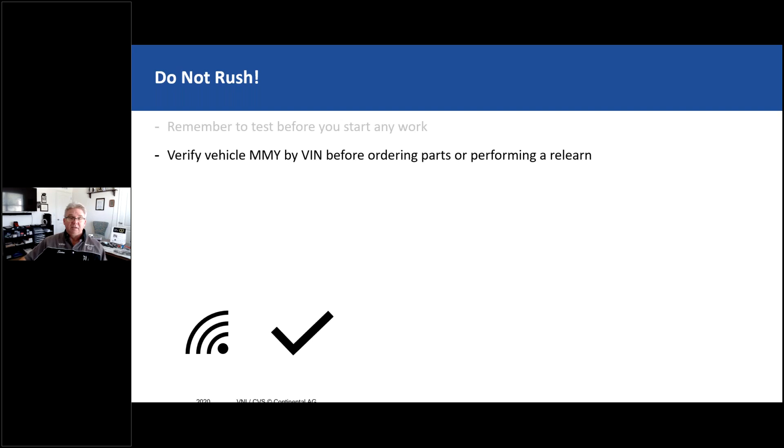So what we need to remember is test before we start any work. Verify model year by VIN number. Don't use that build date. We want to go by VIN. Visually inspect the stems, the hex nut, the seal when it's equipped with TPMS. Look at that telltale MIL every time the customer brings that vehicle or you bring that vehicle into the bay. Document whether it has TPMS and note the status of that telltale or MIL.

So many technicians forget to note the status, and then you get all done and the light's on or it's flashing and you can't remember what it was doing when you brought it in. Just note that status. Many companies are requiring them to write down, does it have a TPMS light on, off, flashing, whatever it is. And inform the customer. Many of us now have to inform the customer of different things on their vehicle.

TPMS is one. If we inform them that, hey, you've got 4 sensors on this car, one of them's bad, they last 7 to 10 years, your car's 8 years old, it might have 80,000 miles on it, you have one sensor bad, the other 3 can probably go bad. Do you want to change all 4 or just one? It doesn't matter what they do at that point. What you've done is let them know that there's other sensors on that car.

If we don't let them know there's other sensors on that car and they leave and another sensor fails, they're immediately going to think that the work you did has failed. So then they're going to come back and say, hey, that sensor you put in is not good. No, it's actually another sensor and you're going to have to do it. Now they're upset. So we need to inform them of the number of sensors and their lifespan.

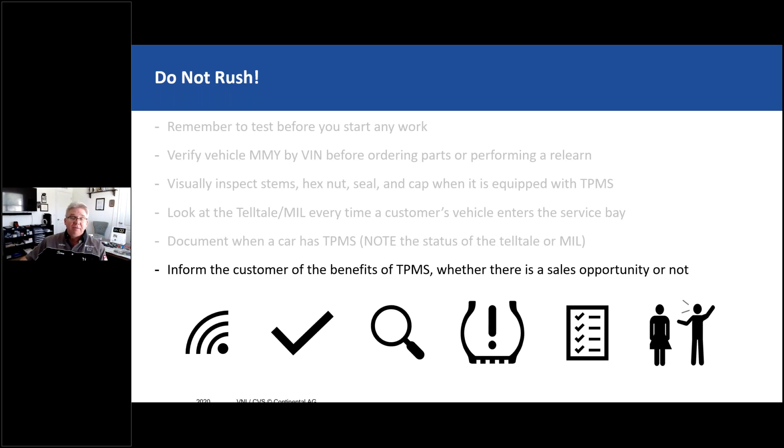Have a reliable source to get the sensors. Get familiar with shop tools and products. Know how to use that tool that you have there. Know who to call for troubleshooting. We have a tech helpline, and many other companies, TPMS tool manufacturers, all have that.

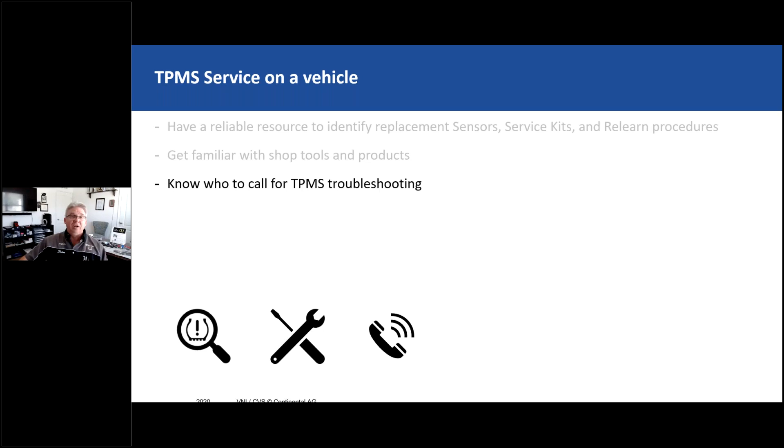When a relearn is started, vehicles only want one sensor talking at a time, the one you trigger, not the one in your pocket or in the car or on the lift arms, one at a time. And most of those systems are smart enough to realize something's interfering. If you work in a dealership where a lot of like vehicles pull up, chances are of getting interference, crosstalk, different things from those vehicles. So most of the systems are smart enough.

And read that tool. If it says 0 PSI and you're triggering a sensor at a tire that has 30-some PSI in it, you picked up a sensor from somewhere else. Figure out where that is. Make sure you look at that tool. Use that tool. It's a key component to doing your relearns. That's why it must be updated. And do not get frustrated. That I know can happen.